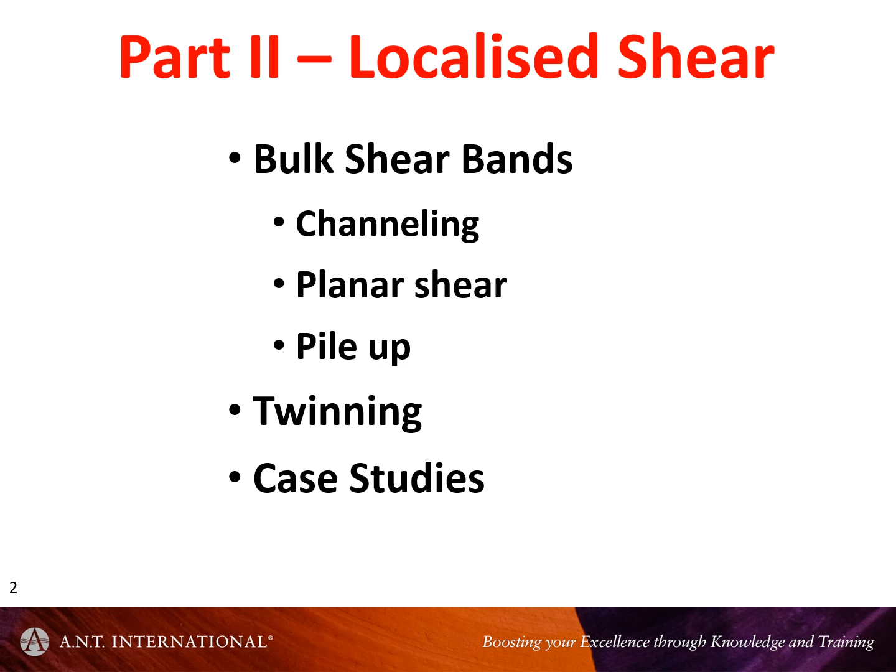So let's get into it. We'll start by giving some examples of what we mean by channeling.

If I was to summarize, not just making this up now, channeling happens in irradiated materials, and it happens because for whatever reason, the deformation, dislocation slip, becomes localized, occurs at a given point, and the dislocations run through the material, sweep through the material in layers which are basically parallel with the slip plane, and sweep out the dislocations.

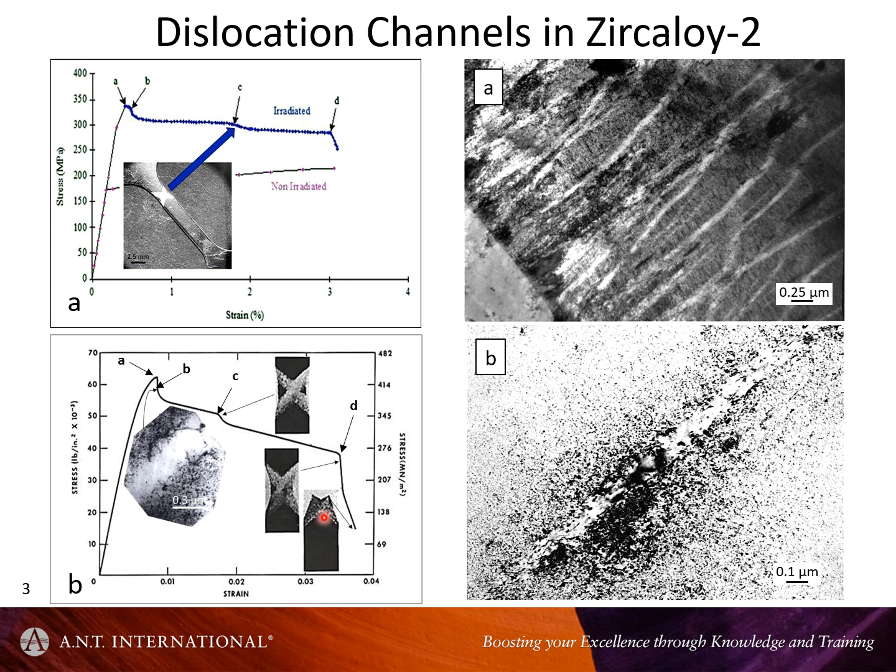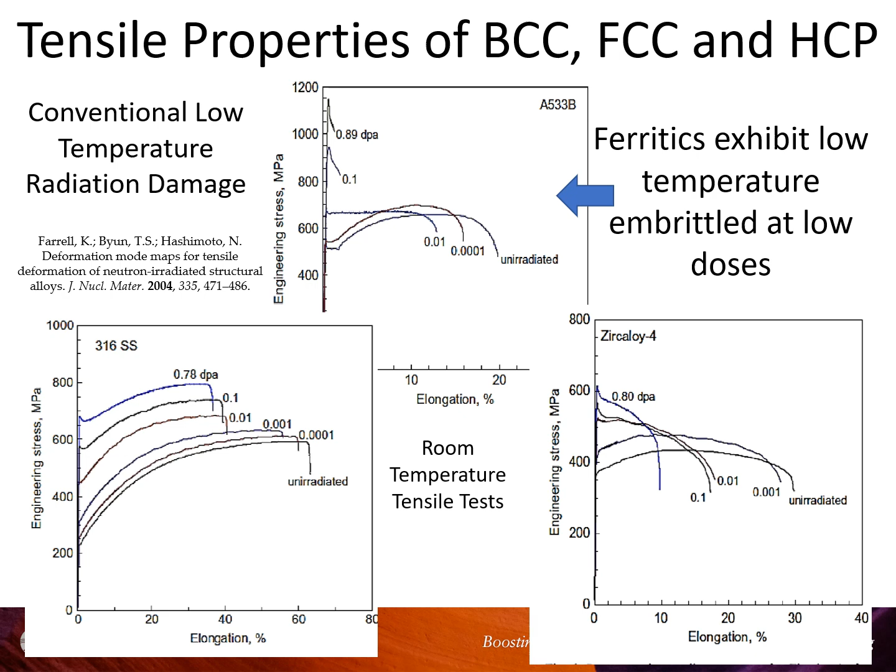So let's move on. What is the channeling? This is what we're interested in right now. Channeling is this phenomenon where the gliding dislocations sweep through the material and pick up the prismatic dislocation loops. What that means is you might start off with a slip band or a slip plane where all the dislocations are in one plane, but as they sweep up and accommodate the loops, their slip plane will vary, and the channel height, if you like, will broaden.

So if you imagine this, we're looking parallel with the slip plane, in the direction of the shear, a distance along from the source where a dislocation slip system—call it a slip band, band is a misnomer, but a dislocation slip system is operating—and as it moves further, the volume of material over which the dislocations are active expands, much like a twin. The shear is in this direction, and the strain is always perpendicular to the plane of the paper in this particular case.

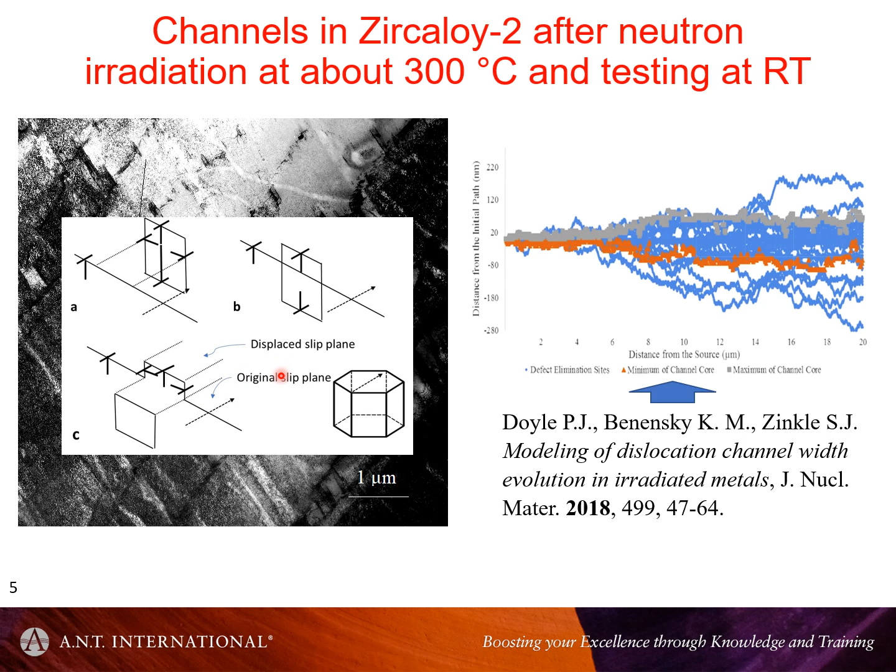And what we end up with then is this broadening of the plane over which the dislocation interacts with the material.

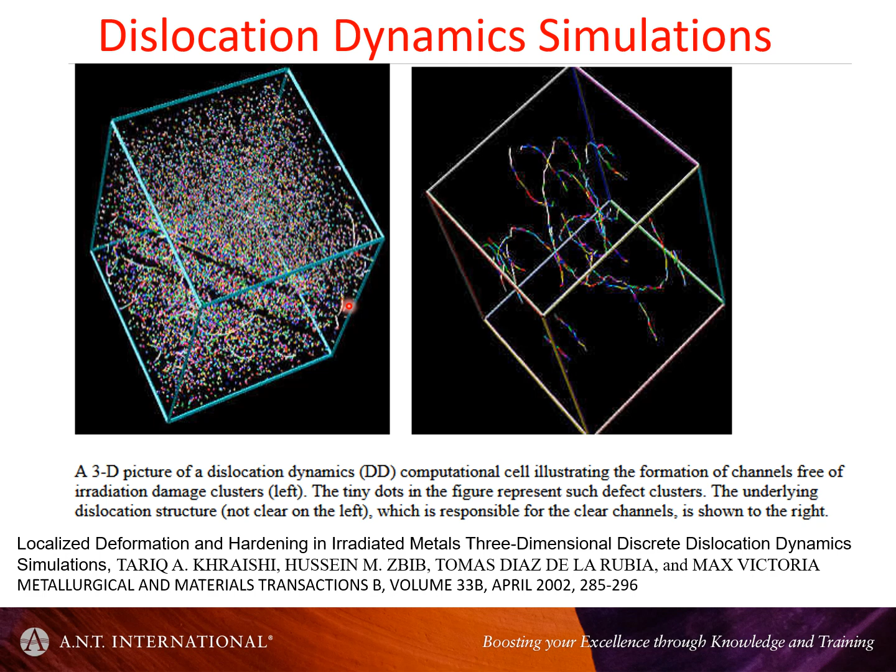Here's an example from some dislocation dynamics simulations. Unfortunately, I don't have the simulation—I asked this guy Tariq if he had a video, and he said he doesn't, so he gave me this and a reprint of his. It basically shows in a simulation exactly what we showed you there in that channel broadening, that you get dislocations traveling through the material and sweeping up the loops.

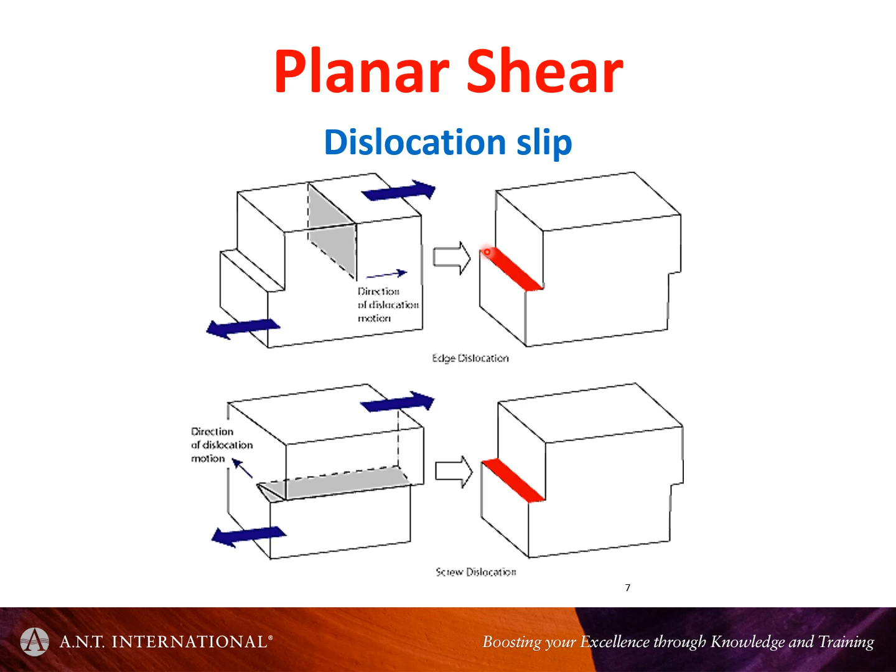Okay, so I mentioned how normally shear dislocation slip is on one plane. Now it can be an edge dislocation like this, or it can be a screw dislocation—it doesn't really matter. The thing to pay attention to is that the deformation is on one plane. So we've got a planar shear.

So I think where the ambiguity comes in, and this is where I really want to emphasize this now, in calling these things slip bands: typically people will observe dislocation slipping on a slip plane in a TEM foil, which is really a slice through the material. So you're taking a thin slice through the material, and when you look down on the slip plane, what you actually see are these segments of the dislocation having cut off the rest of it. This then gets called a slip band.

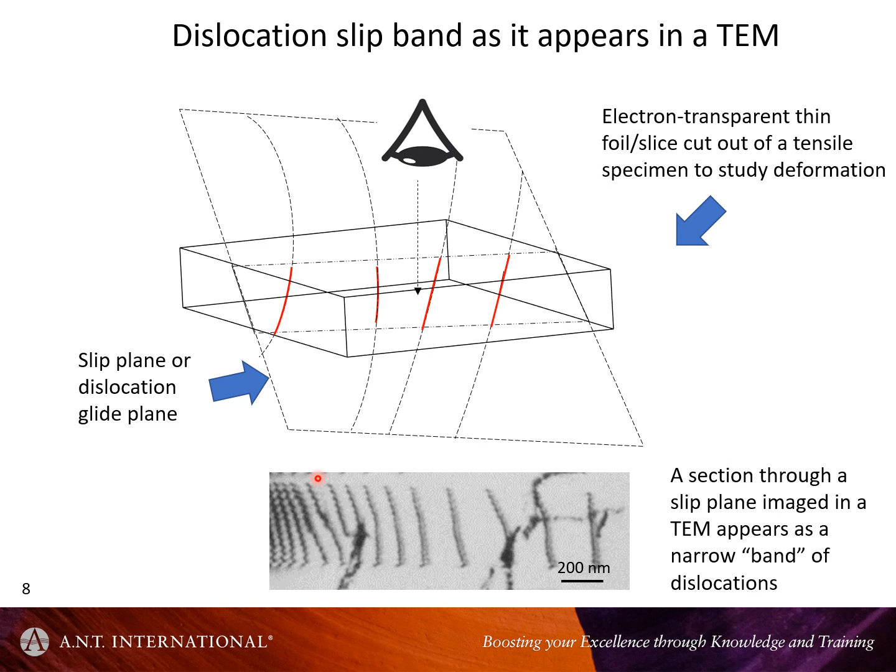I'm not sure that that's exactly the right terminology, but we'll call it a slip band for the sake of argument, even though it's not particularly correct. But the implication here, and I think this is where some people get mixed up, is it appears like it has a finite width, but it really isn't. It's basically an artifact—if you think of it in those terms, it's human produced. It's an artifact of the preparation and how one images the material.

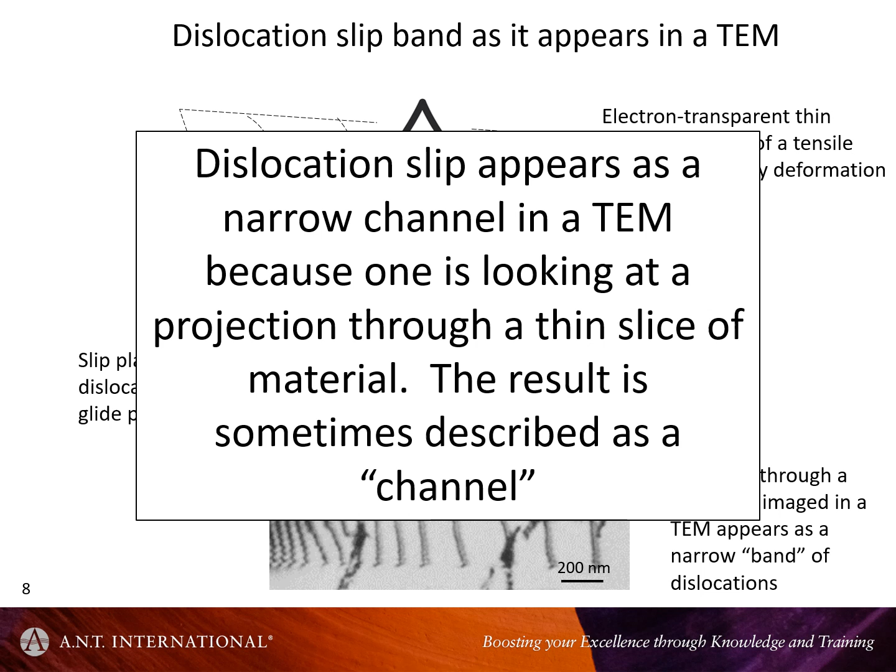So dislocation slip appears as a narrow channel in TEM because we're looking at a projection. And channel, that's the right way to describe it. Here's another couple of schematics just to show how one would view a slice through a slip plane and how it would appear in the microscope. And if you really wanted to verify that you have slip on one plane, you'd have to tilt the slip plane to the edge-on configuration, in which case you'd just see little lines like this.

Oh, I've got 2 slides in here somewhere.

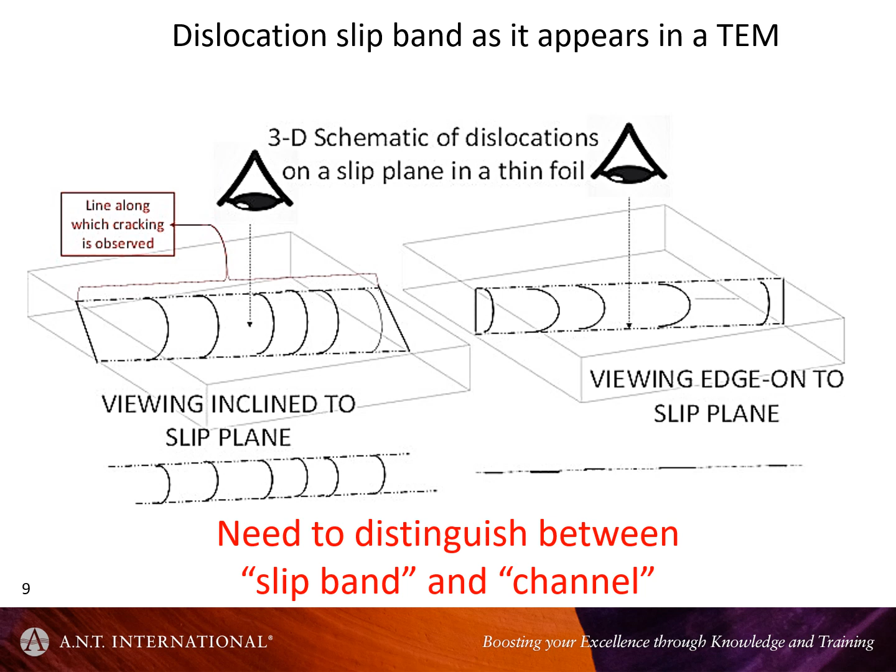The issue here is we need to distinguish what is a slip band and what is a channel, and the whole issue of planar slip.

This brings us on to pileup. Pileup is a mechanism where the stress at the head of a dislocation, a series of dislocations following one another, when they hit a barrier and the lead dislocation is held up, there can be a situation where you get amplification of the stress because of the way the dislocations interact.

This is from a paper by a guy called Roman Voskoboynikov, and it shows that if you have lots of dislocations and a very large difference between the applied stress and the stress necessary to move the dislocation, you can get a significant amount of amplification.

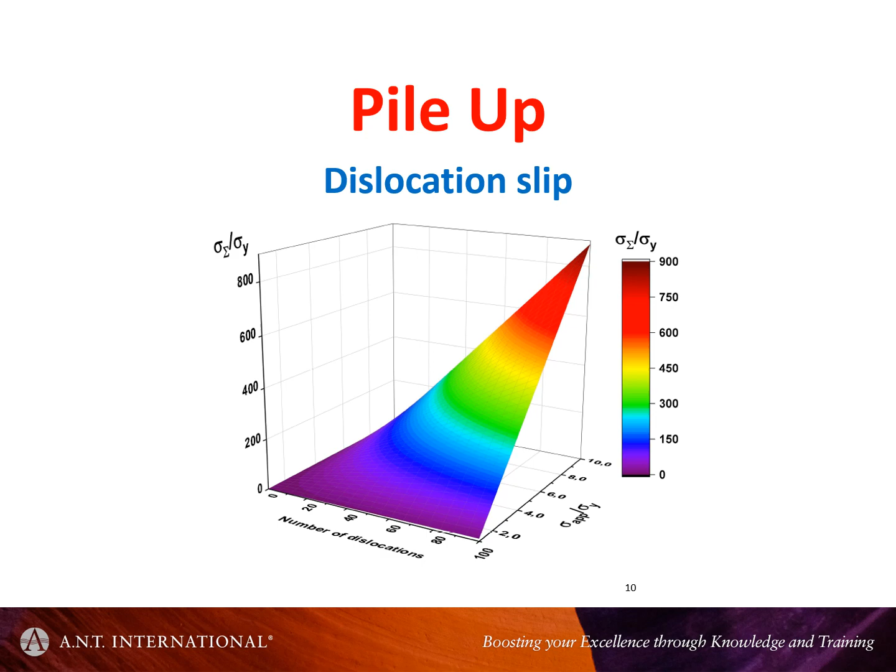I'm not going to go through this, but there have been lots of studies about it. What you need to pay attention to is considering situations where dislocations are emitted from a source, could be screw or edge dislocations, and these dislocations move along a slip plane and then come into a block, a barrier.

The stress at this point, the shear stress in this particular case, can increase significantly, and the shear stress of the lock is given by this expression, where n is the number of dislocations in the slip band, the external shear stress is given by sigma ext, and sigma i is the lattice friction stress.

This concept was first conceptualized by Alan Cottrell and later formalized by Eshelby. Eshelby and company had a very elegant study to show that these dislocations' equilibrium positions, depending on the applied stress and the number of dislocations, can be reduced to a polynomial, where the dislocation positions at stable minima in energy are the roots of the polynomial. It's kind of neat.

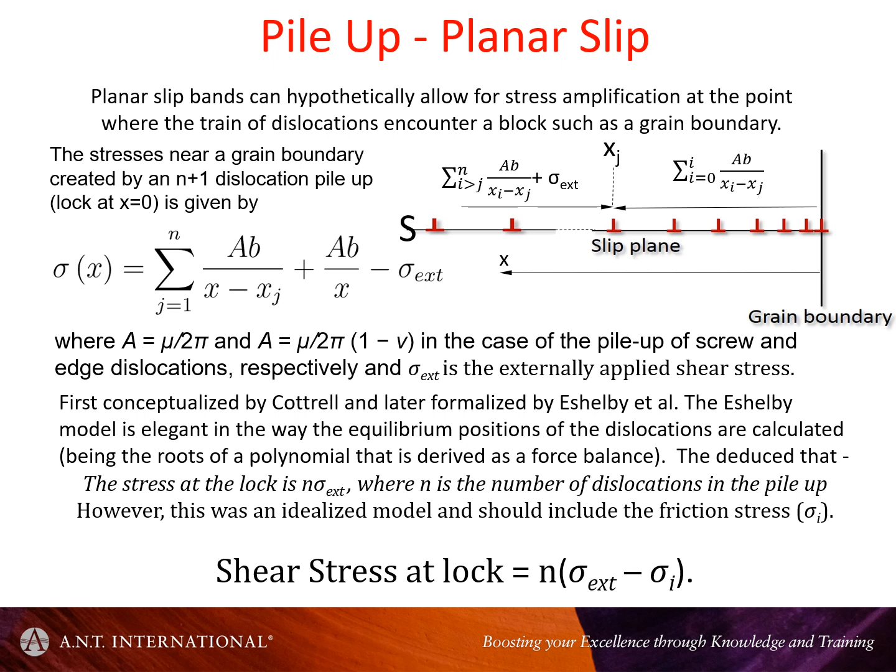So where does this take us? You can think about that increased stress, and if you take it to an extreme, many years ago the likes of Stroh - when I was at school it was Stroh, I guess because he was English, but other people quote this other guy, Zener. It seems like they both invented or conceptualized the same thing at the same time, so it's difficult to know who was the originator.

Either way, it's kind of esoteric. It's certainly a concept, and I'm not sure the proof has ever been fully established.

The idea is that if you have enough dislocations in the lock, in the slip band against a lock, and the applied stress is sufficiently high - say 10 times the lattice friction stress - it's possible to force dislocations together and create, on a microscopic scale, a crack. But even for two dislocations, the applied stress at this point has to be extremely high - 20 gigapascals is roughly what one would expect for two edge dislocations.

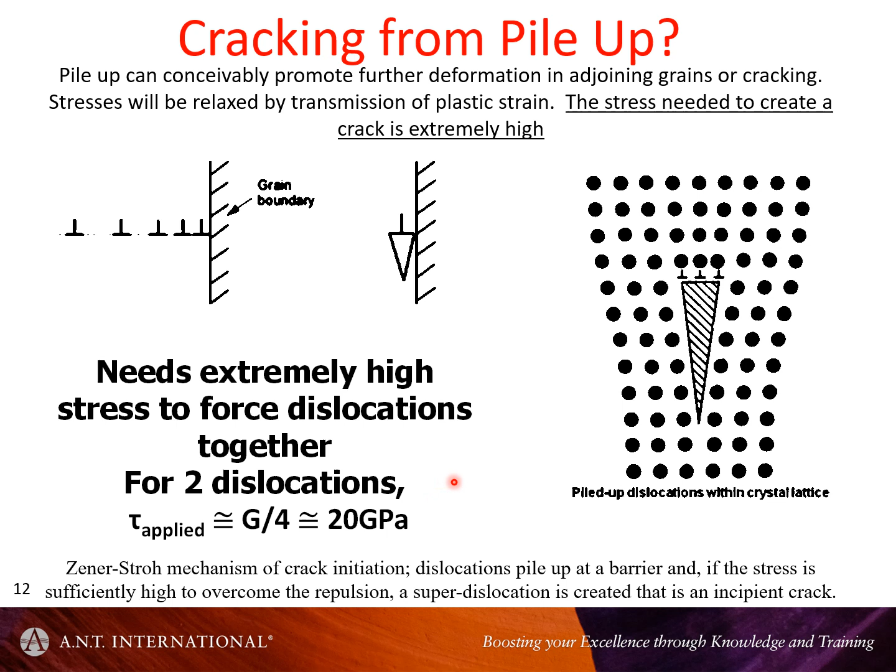So in getting to this amplification situation at a lock, there's been a lot of study about channeling, because I think there's a mistaken belief that channeling somehow gives an indication of this amplification happening.

As I explained earlier, channeling itself is a bulk shear. In effect, it becomes more like a twin when it advances, and the dislocations are not all lined up one behind the other like a train. So the channel itself, when it interacts with a barrier, cannot generate the kind of stresses that Cottrell and Eshelby conceived of, and also Stroh conceived of.

What you have to then get into is a kind of hand-waving discussion or hypothesis that once you've got the channel created, that opens up the material - softer material - and would allow more slip, and then you could create a slip band. But this is an extra step one has to hypothesize that may or may not apply. It's okay to be hypothetical about these things, but establishing the proof is not so easy.

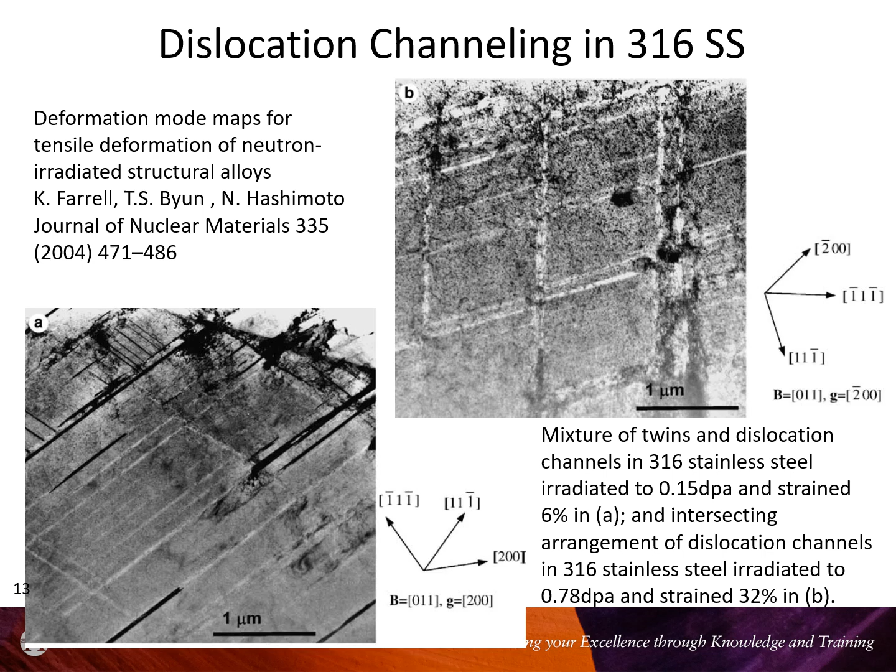So just making it very clear to everybody, you have to be careful that you don't mistake twins from channels. But you can often tell when you have a twin because of the contrast, because the channel itself should not change the diffraction contrast. There'll be a contrast difference simply because there are fewer loops in the channel, but the actual matrix and the scattering of the electrons should not change. It will not change in the channel, but it will for a twin.

So these guys did some very nice work as well, just to show, just if anybody's curious, because often people focus on channels and they ignore the fact that when you deform, when you produce a stainless steel sample, when it's mechanically cold worked, for instance, or deformed in some way under the right conditions, you produce all kinds of things. It becomes a very complicated microstructure, and they broke it down here into the type of stuff you generate depending on the strain.

At low strains, dislocations. At higher strains, in this case for 304 stainless steel, epsilon martensite as well as dislocations. And then at very high strain, well 20% strain, greater than a certain stress here, 600 megapascals, and that corresponds to a number that T.S. Byun came up with. It basically, at around about 600 megapascals, twin formation can occur.

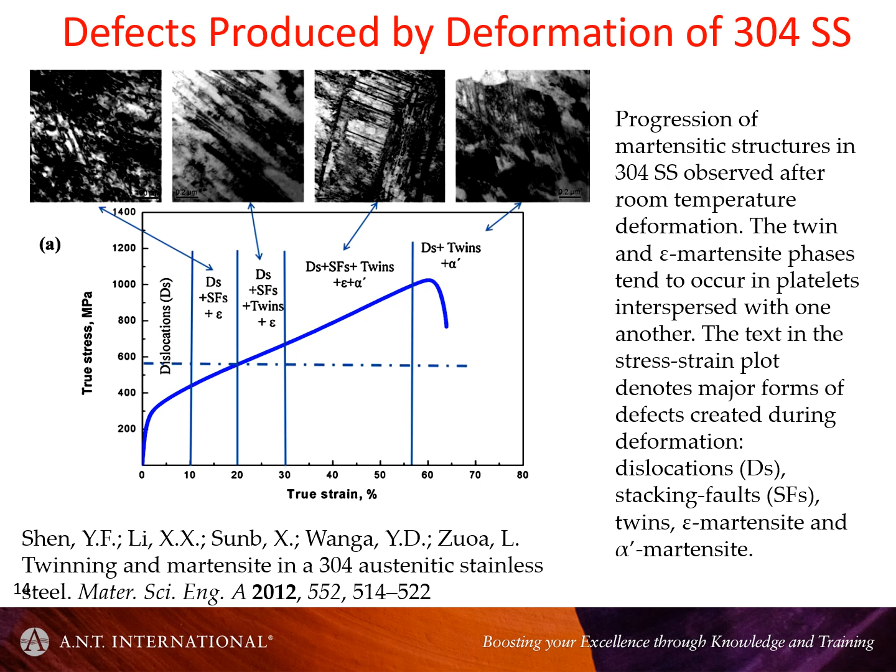And then they go on, and you get other stuff, including even the alpha prime martensite, except I'm not sure they mean the BCT form. I think they probably mean the BCC form of martensite. Okay, so twinning is pretty common. We should understand it a little bit better.

Now for zirconium, zirconium is an interesting material in that there are lots of opportunities for twinning. And just as there are lots of opportunities for different slip systems, because you have a range of planes which have a similar atom packing density, and so the variability in the shear stress, the Peierls stress needed to operate slip systems on these different planes, there's not a big spread, and you can, depending on the stress state, generate all kinds of dislocations. You can generate C-component dislocations as well as A-type dislocations on different planes, the planes inclined to the basal plane, the C plus A type dislocations.

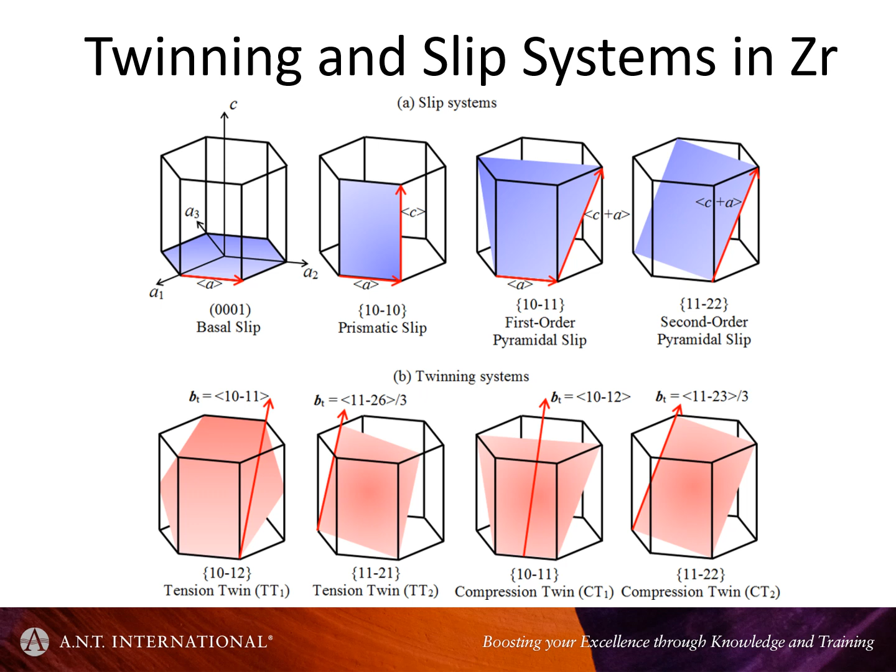Okay, so lots of possible options for twins in the hexagonal system. But in terms of channeling, a lot of the ambiguity comes up when you have twins in the FCC system, face-centered cubic system, austenitic alloys.

So there's only one twin to consider, and that's one that shares a common plane with the normal slip direction, the dislocation slip, the A/2 110 slip. But twinning itself, again depending on what the situation is, and I'll talk a bit more about that, can sometimes occur in preference to dislocation slip. But the difference between them is that one is this planar shear, and the other one is a bulk shear. Planar shear, bulk shear.

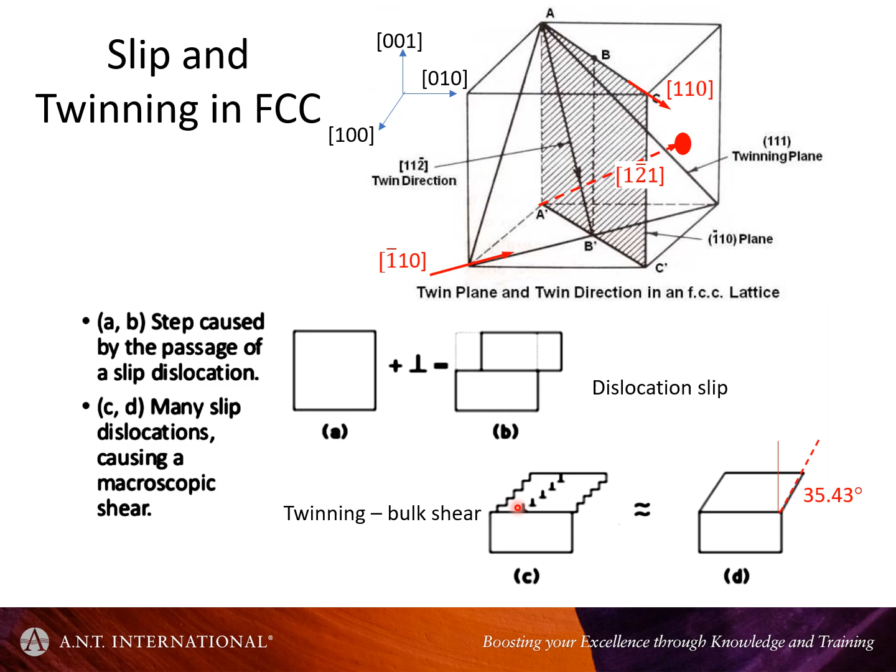What the twin does is it actually makes life very complicated, because you're talking about a mirror, taking a mirror image of the atomic planes in the barred 1-1-0 plane. The mirror image plane is the 1-1-1 plane.

You can see this if you look down the barred 1-1-0 direction, and see the effect of the twin shear. The twin shear occurs over 3 planes, and by the time you've moved from one to the next, the displacement you've taken is a half 1-1-2.

Not going to go into too much detail. The mechanism is well understood, makes total sense, and is very easy to demonstrate with a ball model. But it produces a whole bunch of different orientations. There's only a few that are common to both the twin and the matrix, and only a few which have some rational relationship.

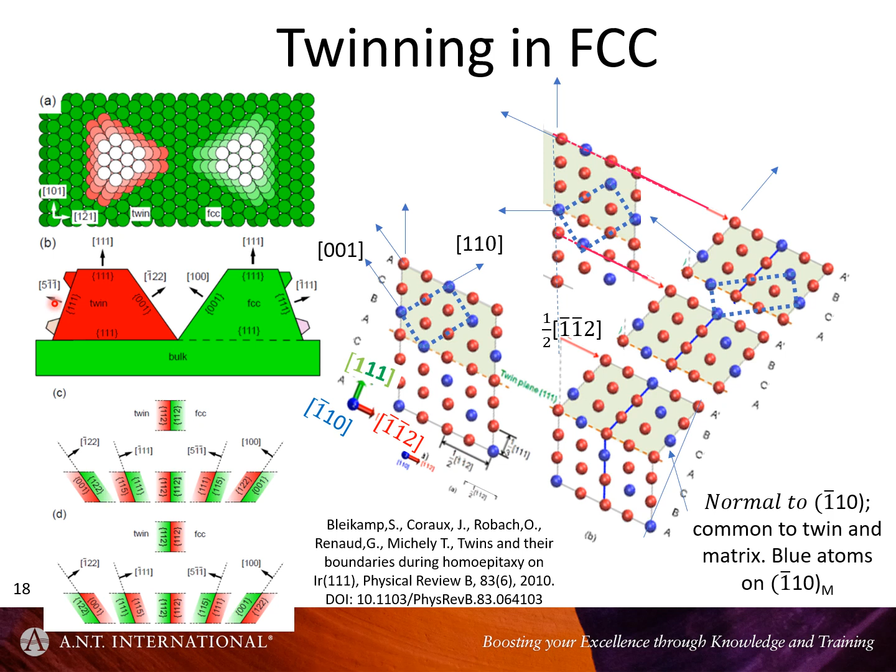So although it's a simple mechanism for deformation, depending on which plane you're interested in, the orientation relationship between the twin and the matrix can be a little bit complex. For instance, this particular 1-1-1 plane in the twin is common to the 5-1-1 plane in the matrix.

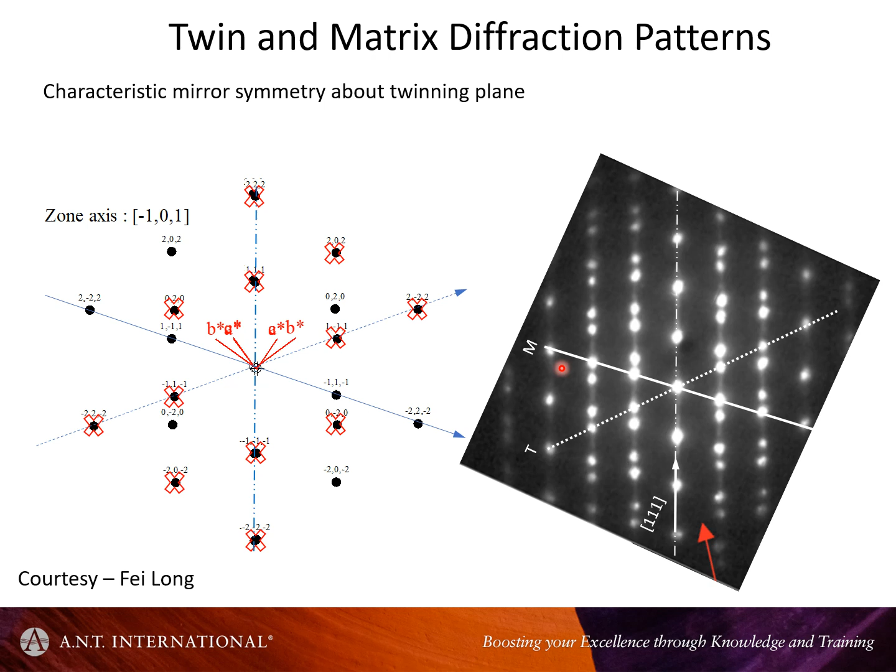But when you do have a twin, it's generally pretty obvious—you can see it in the diffraction pattern. What you see is a set of double images. If we look at one systematic row of diffraction spots, which would be perpendicular to the twin plane, we have a mirror image on either side of this systematic row.

So where does it become important? Well, it's very important to know what kind of deformation you've got, because that determines what kind of mechanisms you're trying to decide are operative in a material.

In the last 10 years, there's been a lot more exposure to bubbles, small cavities in neutron irradiated materials at low temperatures, whether it's steels or in this case, Inconel X750. Actually, this isn't from the CANDU reactor—this is a proton irradiation, a helium ion implantation followed by deformation.

This is some work done at Queen's, and I see I've left off the reference here. I'll have to put that reference on a slide later. So, a couple of points to note here.

This band, we'll call a twin. Within the twin, you can see some shearing of the implanted cavities. These cavities would have looked like this in the matrix prior to testing, and then during testing you induce some twinning, which shears the cavities as shown.

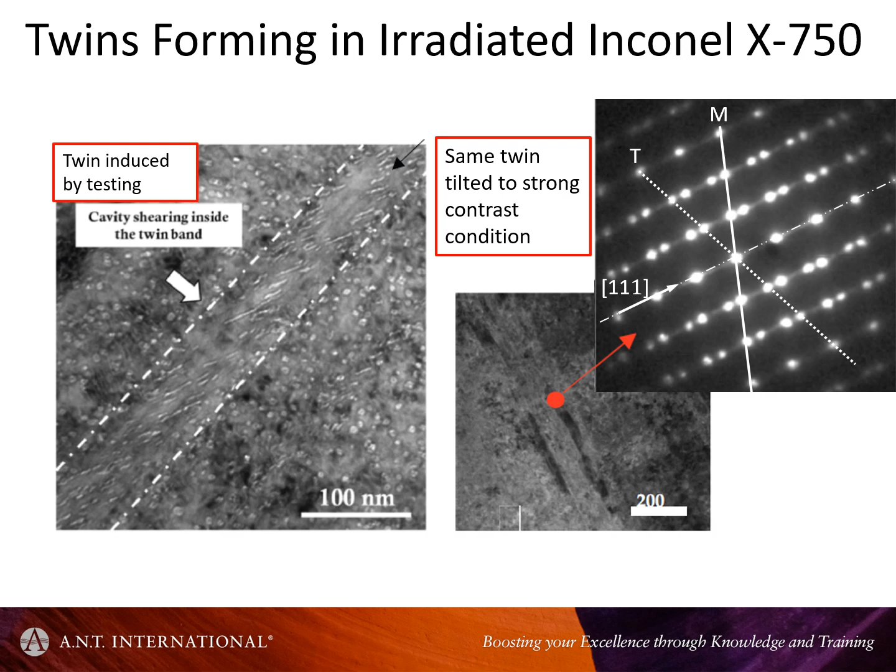I mentioned the ball model demonstration. In a live presentation, I'd be showing how all of these things come together.

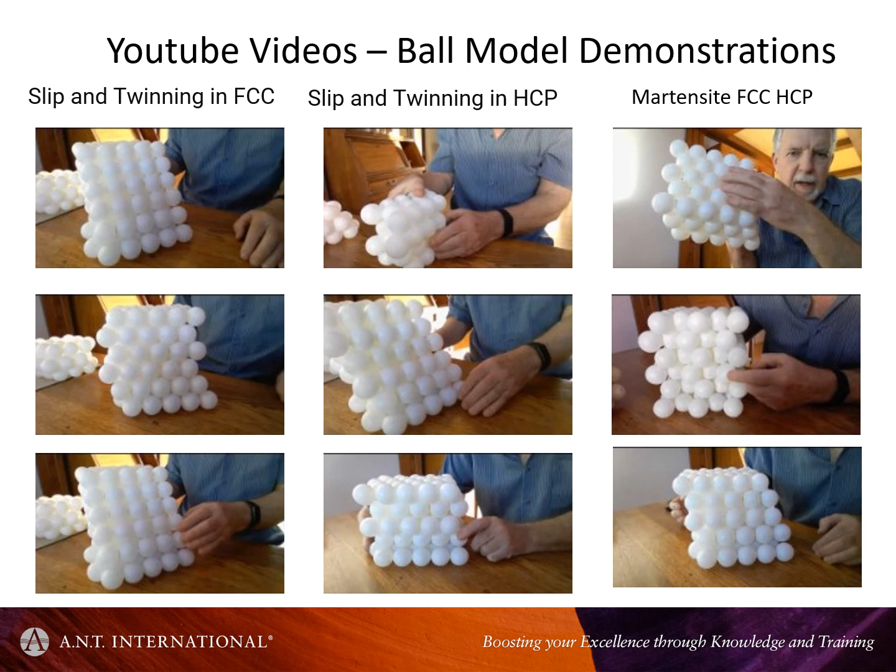I'm wondering if—oh, I've just lost that. I don't know how that happened. Maybe because I'm recording this, the system doesn't like it. Oh, sorry, unfortunately that was my fault. I shouldn't try and do an animation because it gets out of whack. I made the mistake of trying to operate one of those.

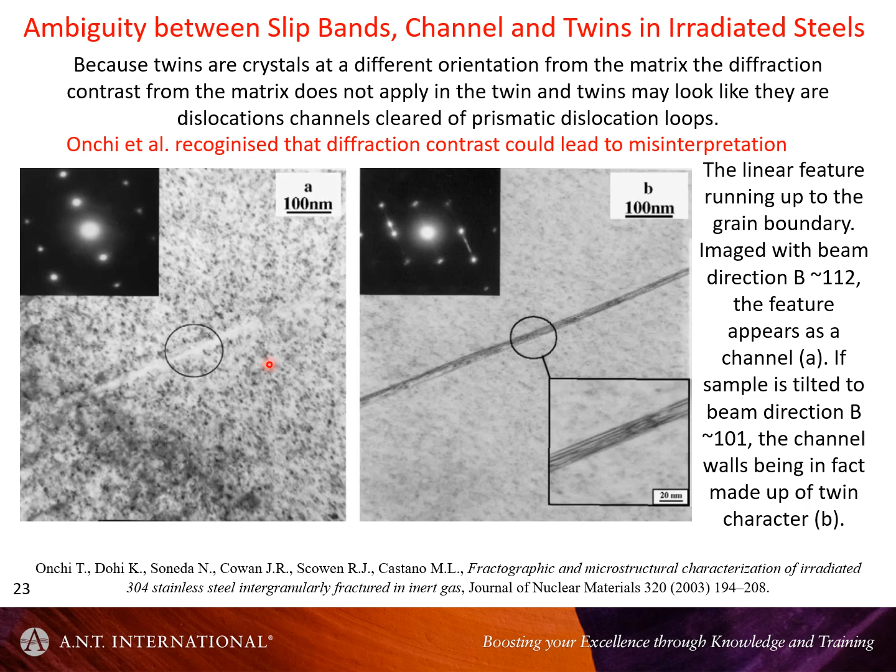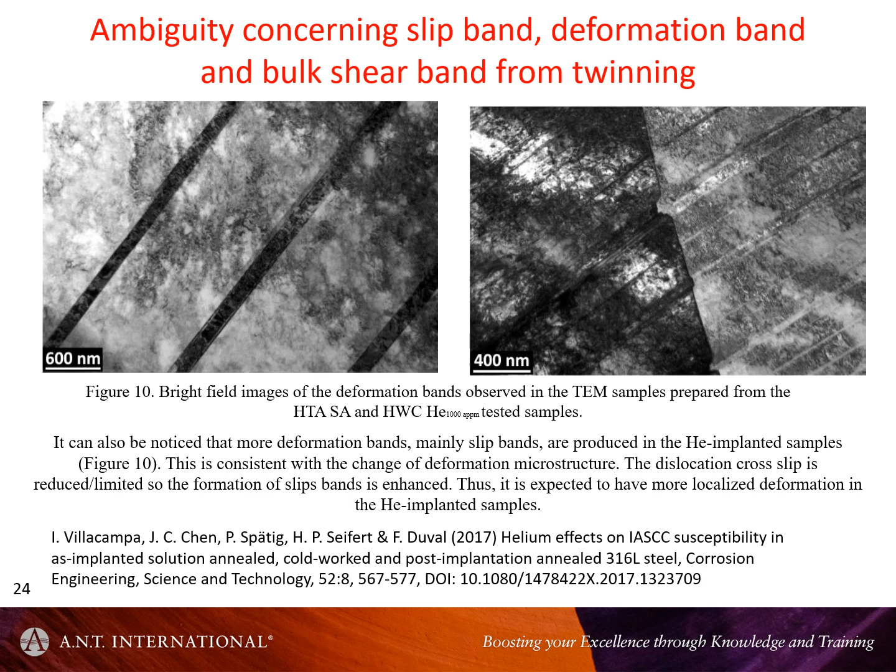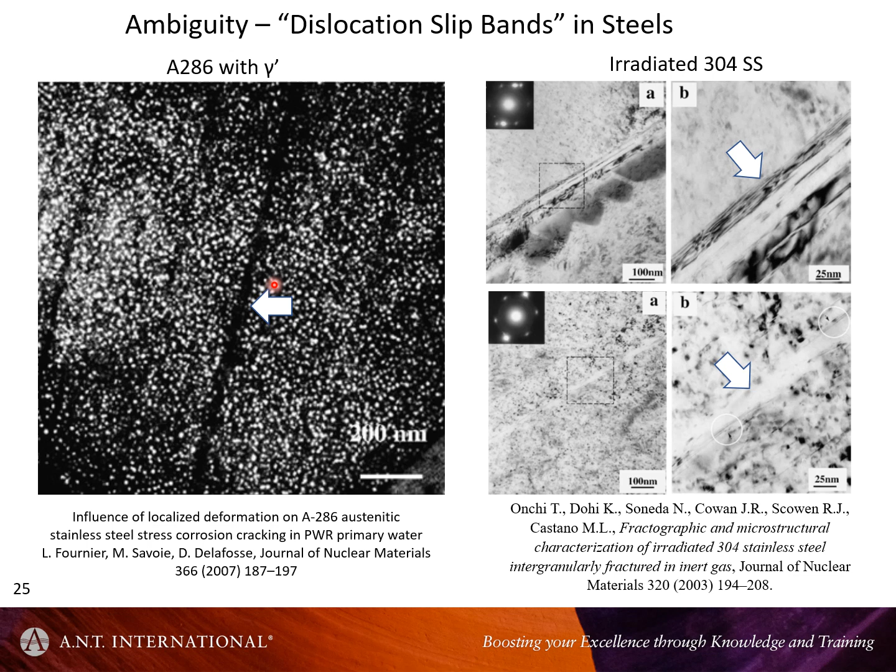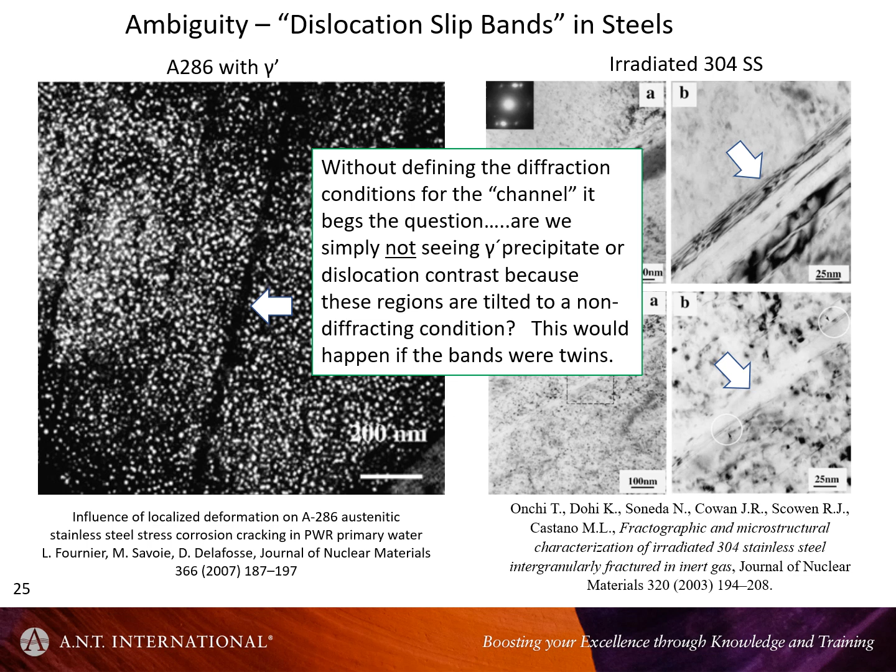The best way to interpret that is that it's a twin, and you've simply tilted the material to an orientation where the gamma prime doesn't show up. So unfortunately, people still talk in terms of channels, and this can be very confusing, very ambiguous. You have to be aware of that and be careful about how you interpret what is presented.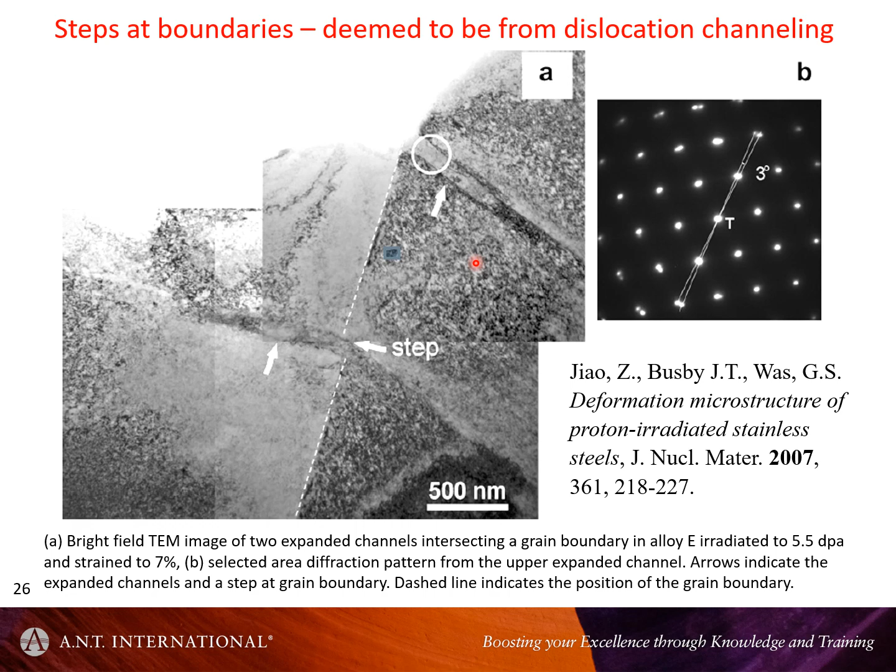There's a diffraction pattern from this area, and because of this diffraction pattern, they deduced that this was not a twin, for example. But it doesn't look like a channel either. I don't know what it is. If you look at this in more detail, you've got something here. What is it? I really don't know.

There is some orientation, tilt orientation, but they attributed that to slip, which makes no sense whatsoever, because slip is a planar translation. To get a change in the orientation of a crystal, it has to be a subgrain boundary. The only other way is to have some constraints, but if you've got a foil, you've relaxed the constraints, so it's very difficult to envisage that could be real.

But you've got this peculiar structure here, which could indicate subgrain boundaries - I don't know - in this odd shape, it could be you had a different phase here, which has since disappeared. I really don't know. But channel, I'm not sure.

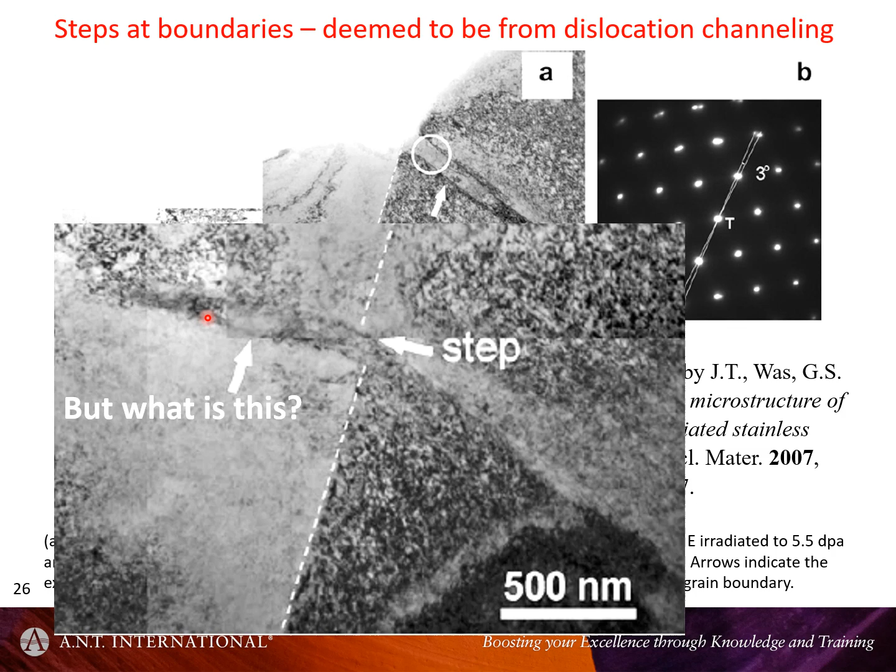Just to quote, they say the selected area diffraction pattern of an expanded channel. That's another oddity - they talk about this being an expansion, kind of expanding in the direction of the arrow, which again is kind of odd. I'm not sure that is very rigorous in how that was explained. It certainly isn't too logical. And they say it's just a systematic rotation of atomic planes in the expanded channel relative to the adjacent area.

It could be a twin, and we're just looking at it at a particular 1-1-0 direction, which doesn't show up the mirror symmetry. It could also be a crystal where you've had two twins, in which case you go from a tilted sample back to being in register again. So if there were two twin shears, you wouldn't see them.

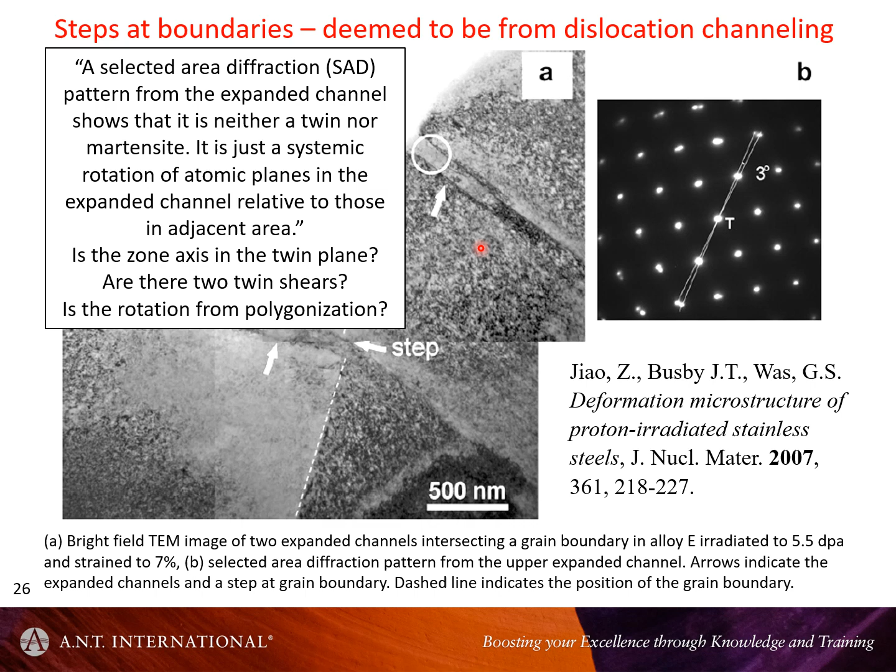Whatever that feature is, it looks odd, and I hate to say what it is, but the rotation could also be from polygonization. If you had a string of dislocations which had all butted up against this barrier, if you call it a barrier for some reason, then you would create something like a polygonized wall, and that would give you a small tilt.

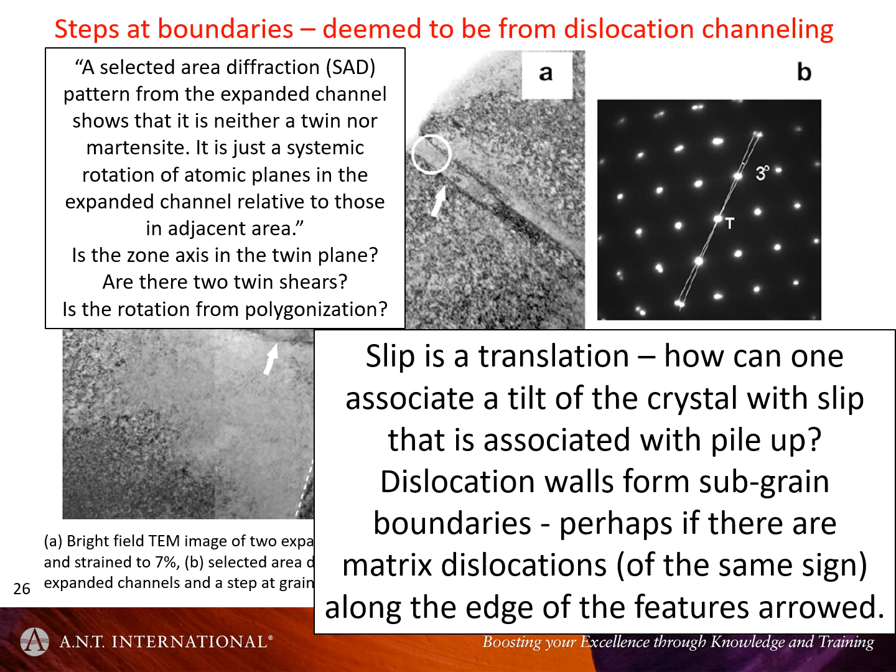It's very difficult to, again, it's very ambiguous how these things get described. It seems that because this saying that there's these high stresses and deformation of the grain boundary, shear of the grain boundary, that the tilt of the crystal might be from pileup, but it just doesn't make sense. So what would make a bit more sense is if you had a whole string of dislocations along a line which would be the barrier to something, in which case you have that shear, and it can be explained simply by polygonization.

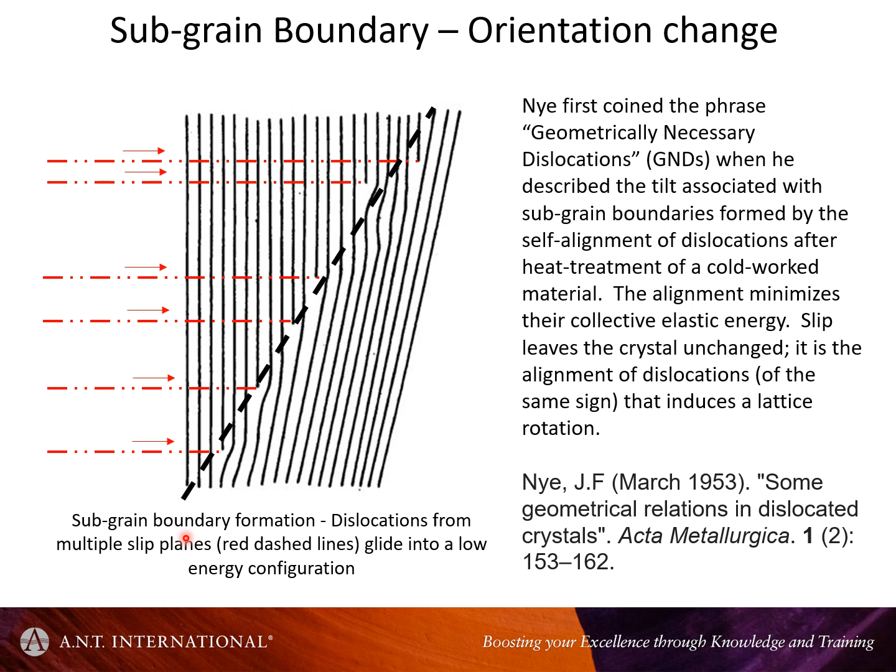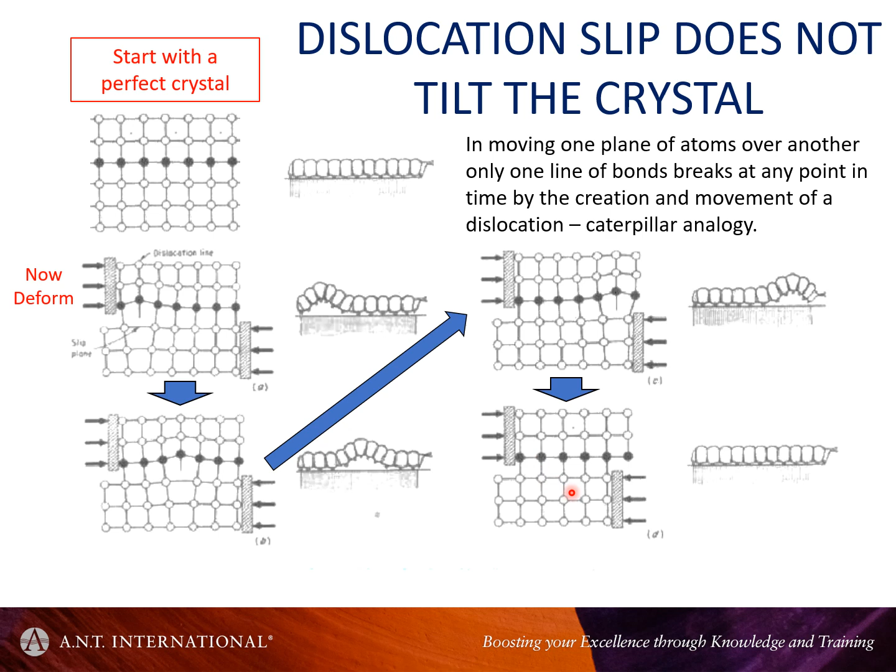This slip operation, this change in the shape of the material, may affect the constraints, may elastically affect the whole crystal. You may get some rotation or bending, kind of hard to say, it depends on the situation and what the constraints are. But there may be some effect just by deforming the crystal and changing its shape this way, some effect on how this then fits into the remainder of the material. But for the atoms themselves, at the slip plane, there's no change in orientation. So there you go.